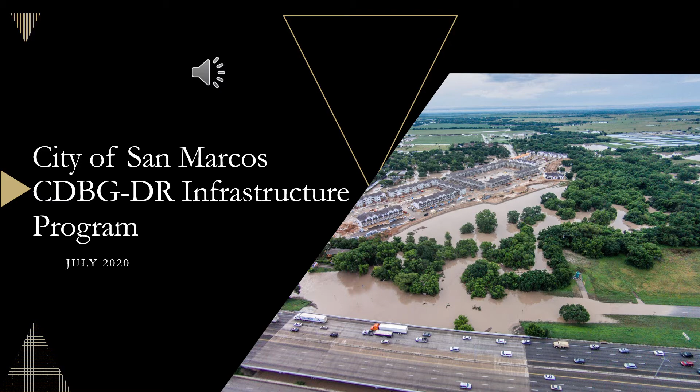Back in 2015, the City of San Marcos experienced two historic flood events that accounted for immense damages to homes and businesses in the community, severely impacting recovery and growth potential. The devastation prompted the U.S. Department of Housing and Urban Development, or HUD, to allocate around $33 million to the Community Development Block Grant Disaster Recovery Fund to assist with ongoing recovery needs.

As you can see here, what's modeled in the video shows the progression of one of the flood events in just one of the areas it covers. If you were in Texas in 2015, chances are you were impacted by these floods, even if you weren't in the floodplain as these areas were.

The CDBG team here at the City of San Marcos is dedicated to ensuring the funds from this program are used in an efficient way to serve the community for its purpose.

Jacque Thomas and myself, Justin Holder, are just two of the members of the CDBG team. We're the engineers handling the oversight of disaster recovery and mitigation infrastructure projects, and work alongside others here at the City of San Marcos to make sure the program runs smoothly. Through this presentation, I'll talk about our experience in the program and what our role means.

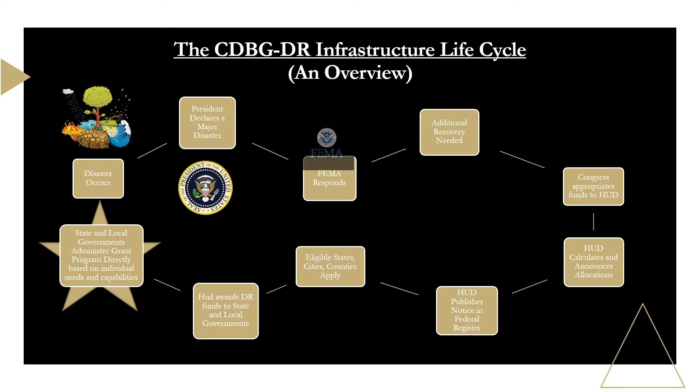Here's a brief overview of how the disaster recovery funds ultimately reach the City of San Marcos. First, the disaster has to occur. For us, it was the 2015 floods, but it can be any major event such as an earthquake, fire, storm, etc. Then the President declares this a major disaster.

FEMA then responds. FEMA is only typically able to respond to immediate needs such as evacuation, debris removal, and in some cases, basic infrastructure restoration. Congress, recognizing this, allocates additional funds to HUD for distribution.

HUD then calculates and announces the available allocations. They post these notices for the available grants in the Federal Register. This allows eligible states, cities, and counties to apply for these grants.

HUD then awards funds to state and local governments. The state and local governments administer the grant program directly based on their individual needs and capabilities. And that's where we come in.

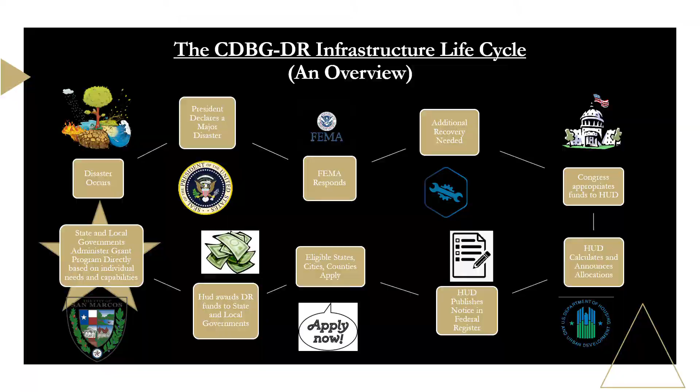At the local government level, the infrastructure projects go through this basic timeline. First, the needs of the community have to be assessed. From this, an official action plan is developed. We then enter the project implementation. This is the bulk of time for the project, which covers scheduling, design, environmental, permitting, utility coordination, bidding, and construction.

Throughout the process, needs are constantly reassessed, and if any budgeting or major scheduling needs change, an amendment has to be made to the action plan. Finally, the grant is closed out once all funds have been expended and the projects are completed.

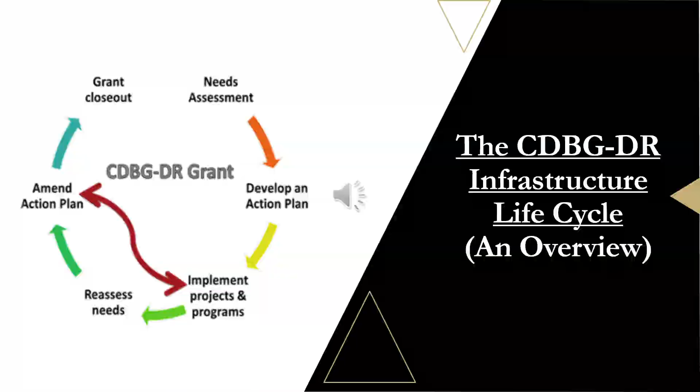Step 1 is the needs assessment. In order to handle this, the city awarded AECOM the infrastructure feasibility study. This identified and prioritized infrastructure projects in the city that were eligible for DR funding.

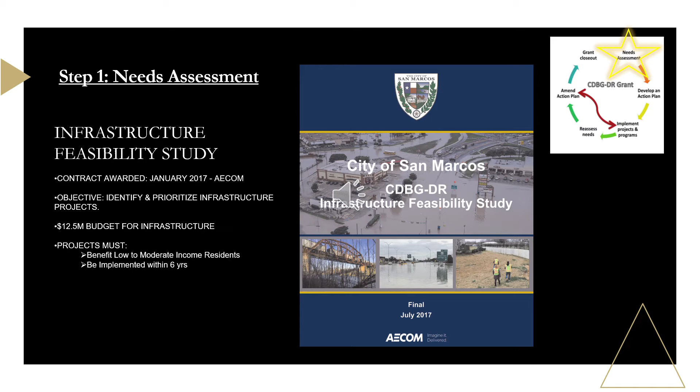Using 2D modeling, AECOM studied the causes for the flooding. In their findings, they determined that both existing infrastructure and proposed solutions cannot handle the 100-year regional flooding with local solutions. However, they can handle local flooding and reduce the impacts of regional flooding.

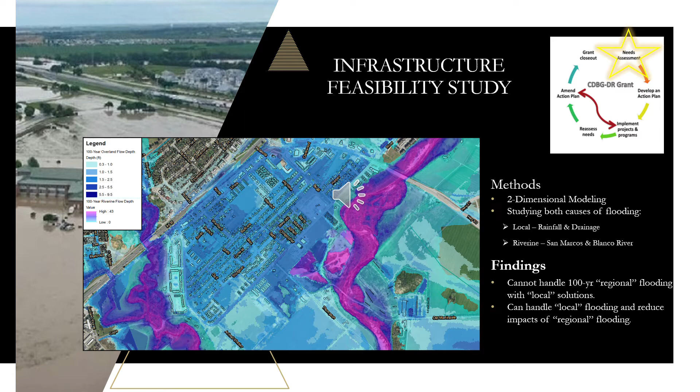The funds allocated from the grant would not be able to cover all the costs for every infrastructure project, and therefore certain factors determined the initial prioritization of projects. Among these were low to mid-income areas, flood risk reduction, good cost-benefit ratios, permitting schedules, mobility improvement, and environmental impact.

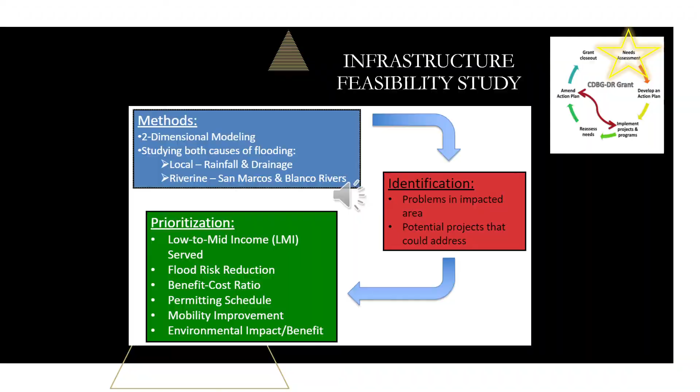From this, a prioritization matrix was established, ranking each of the projects based on this criteria.

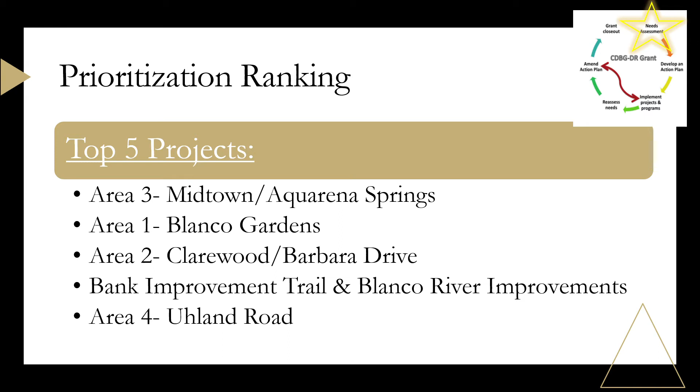From these rankings, 5 projects were ultimately determined to be at the top prioritization: Midtown, Blanco Gardens, Clarewood and Barbara, Bank and Trail Improvements, and Uhland Road. Take a look at some of these numbers and projects, because they will change as we go along.

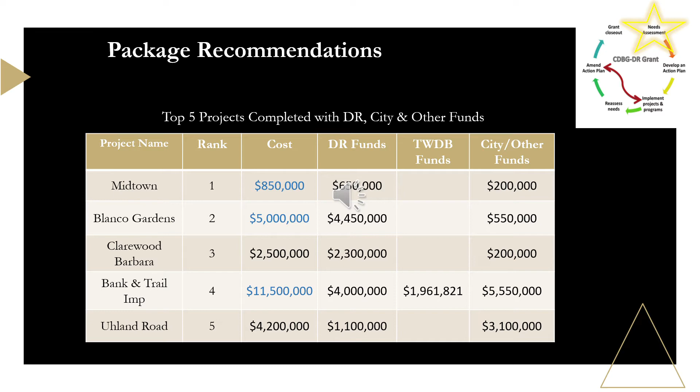The next step in the process is developing the action plan. This lays out the path ahead for budget, timeline, policies and procedures, and prioritization. This is not just for infrastructure projects, but for the entire CDBG DR program as a whole. It includes housing, infrastructure, economic revitalization, and any additional hazard mitigation.

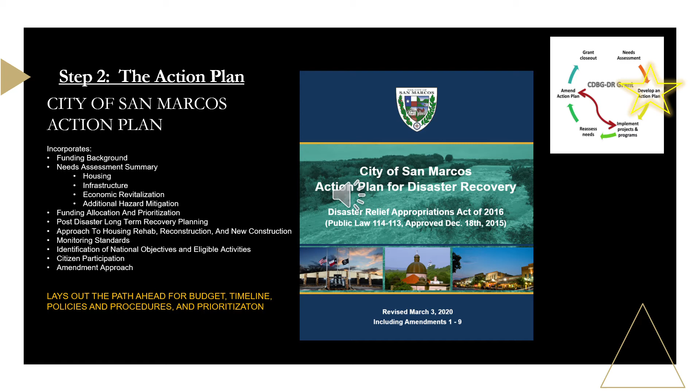Here's a look at the needs assessment as established by the action plan. Between housing and infrastructure, $62 million was estimated to be needed. We were allocated $33,794,000. Therefore, we need to prioritize where this money needs to be spent.

So, what do we do? Well, we go back to the prioritization matrix, where we establish which projects take precedent over others.

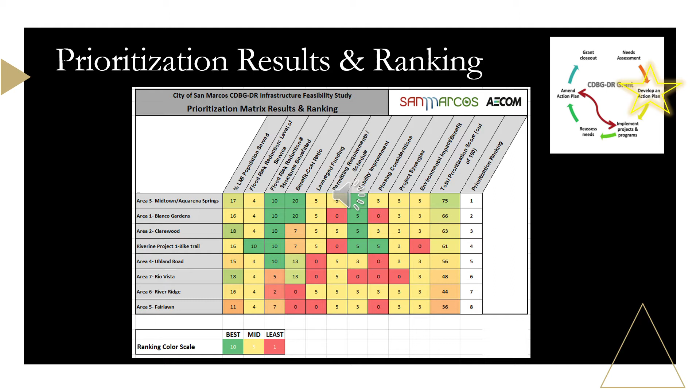So, I mentioned that we had $33 million to spend for this program. Although infrastructure is the majority of this expenditure, it's not the only one. We also have administration, planning, and housing, all extremely important aspects to the whole program.

Even though I don't have quite enough time today to speak in detail about the housing portion of the DR program, I'd be remiss if I didn't at least mention it. There's a whole other team dedicated to running this portion of the grant to handle single-family rehab and reconstruction, single-family reimbursement, rental rehab and reconstruction, and the Public Housing Authority.

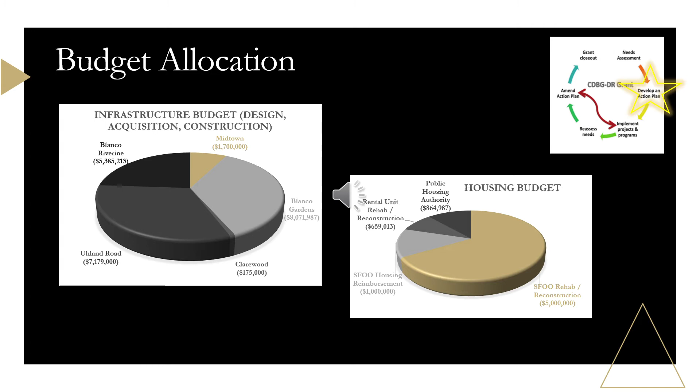Now that we've established the action plan, budgeting, and the projects that we're going to do, let's get into the meat of the subject, the projects.

One of the most important things we can do at the city is establish policies and procedures that we have to abide by. We have policies and procedures for every step of the process: procurement, national objectives, duplication of benefits, risk analysis, timesheets, cost reasonableness, environmental assessment, project design, acquisition, bidding, construction, and closeout. These ensure we go through the necessary steps to complete the project the correct way, and record every single thing we're doing, so it can be repeated.

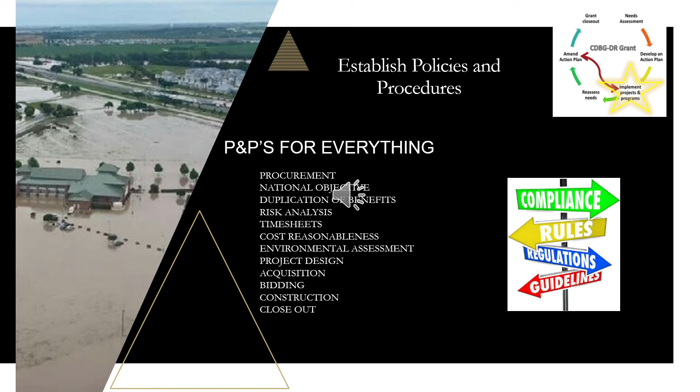Each infrastructure project has to go through these major steps when going through the program. The first step is procurement. In this step, we select the engineer and their subconsultants that are best qualified for the individual project. This selection is based on many things, such as qualification ranking, availability, and familiarity of a certain site area.

The next step in the process is preliminary engineering, report, and design. In this step, we identify detailed needs, surveys, permits, utility conflicts, and establish the realistic expectations for the project going forward.

Then we have the environmental assessment, full design that includes 30, 60, 90, and 100% modeling and construction plans. Then we go into acquisition and relocations, bidding, then full construction, and finally closeout.

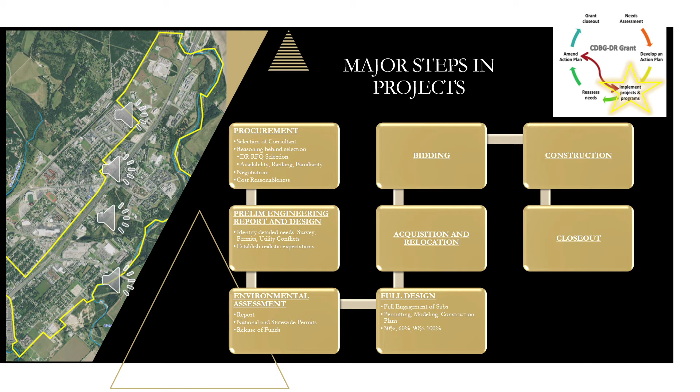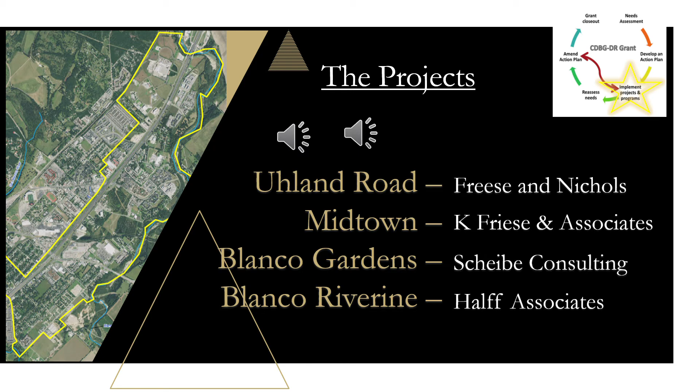Uhland Road will be the first project that will be completed and has been our guinea pig for the whole process. Thank God for Kirk Abbott here at the city, because he has set the precedent for how to organize and develop the regulations for the infrastructure projects.

Uhland focuses on installing new trunk lines and inlets in the neighborhood and replacing existing drainage infrastructure. Water quality measures are also to be installed with this project, exploring a future methodology for future San Marcos capital improvement projects. The reconstruction of roads and expanding pedestrian facilities will also have significant impact on the drainage in this community for recovery efforts.

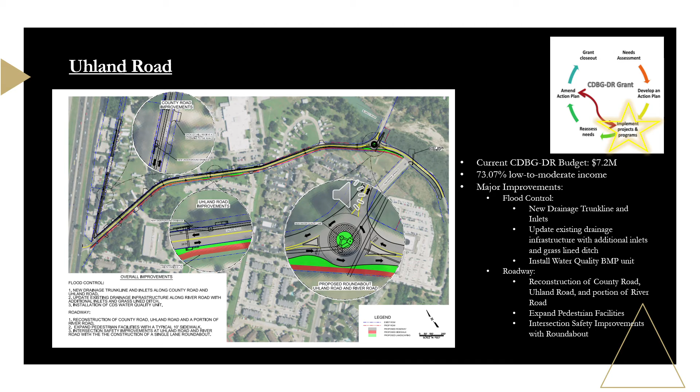Midtown was the top-ranked project on the prioritization matrix. It sets to utilize and improve upon an existing TxDOT drainage channel, upsize culvert crossings, and apply curb cuts and inlets to more efficiently drain water from the highway. This project also creates a new channel to serve existing and future conveyance for developments in the area.

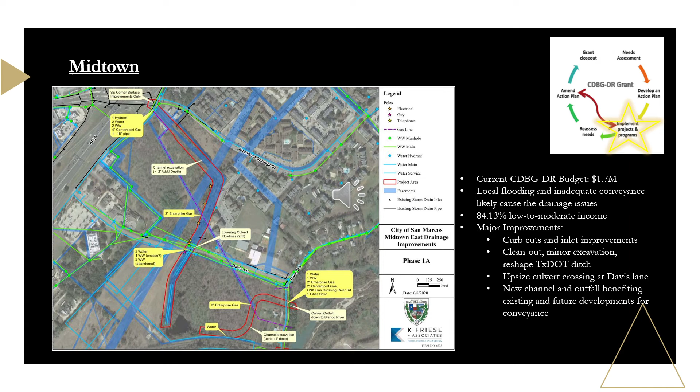Blanco Gardens handles the stormwater in the heart of the flooding from 2015. It proposes culvert crossings across River Road to effectively convey water to the river and replaces and proposes new storm drains and inlets within the neighborhood.

A diversion channel along Animal Shelter Road conveys large amounts of water in major storm events to greatly reduce the risk of flooding. River Road will be regraded to efficiently convey water in storm events to upgrade infrastructure. The neighborhood alleys will also be cleaned and reimagined to provide relief for the residents.

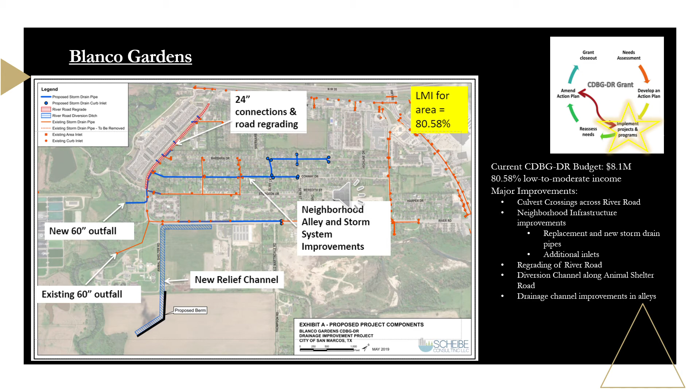Blanco Riverine sets to implement near-term solutions to riverine flooding in the community. The major improvements include multiple berms set throughout the neighborhood, a relief channel, and stream bank stabilization.

Being such a hefty project, the largest hurdle right now is acquiring land in order to build the berms and the channel for this area. Therefore, the DR funds for this project are solely dedicated to the acquisition of property. The design fees are funded by the Texas Water Development Board, and construction is projected to be funded by future CDBG mitigation programs.

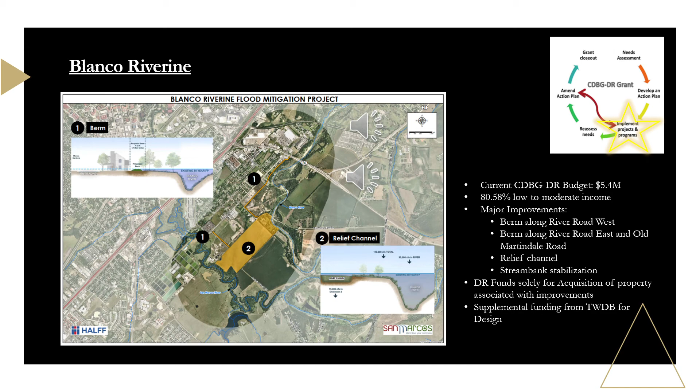Within the design process, we have the environmental assessment. This breaks down every environmental impact that can be associated within the site. Within the EA is permitting for national and statewide permits, which can vary for each project. In addition, notification and coordination to Native tribes, federal, state, and public entities has to occur. Once all this is complete, and a finding of no significant impact or proper mitigation is established, we are able to finally get a release of funds that will allow the city to spend money on acquisition and construction activities.

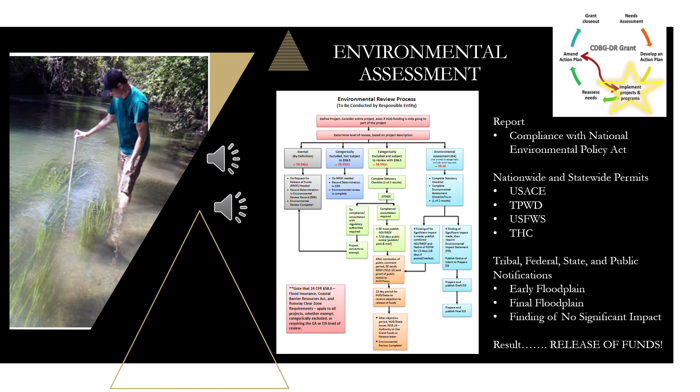Next in the process is coordinating utility conflicts. In the design phase, subsurface utility engineering work is done alongside survey to identify where conflicts occur. From this, franchise utilities are identified and 120-day notices are sent to each entity. While not always the case, engineers from each franchise utility design and contract out the work to be done. The consultant and city staff have to coordinate with these design efforts.

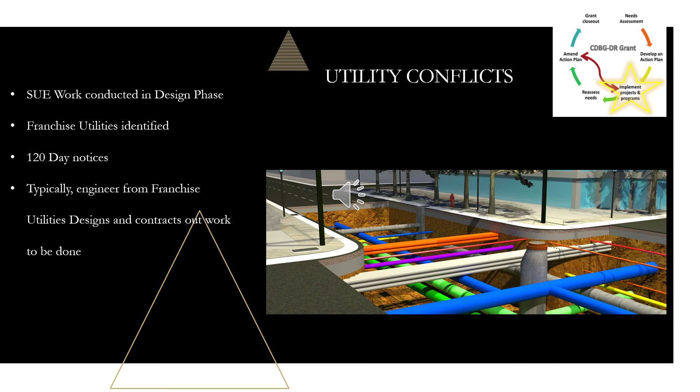Assuming the release of funds has been issued, acquisition and relocation is the next step. If the infrastructure project is within private property, in order for the design to work, the city will have to work with property owners to negotiate acquisition of easements or, in some cases, full takeover of the property. If homeowners are affected, they may have to be relocated and compensated accordingly. In the case a deal can't be made, eminent domain and supplemental legal action will have to take place.

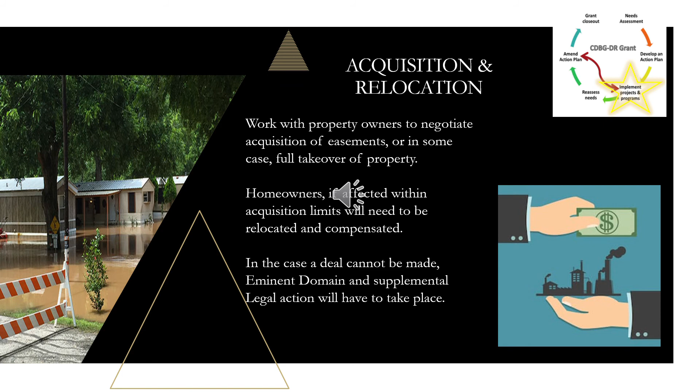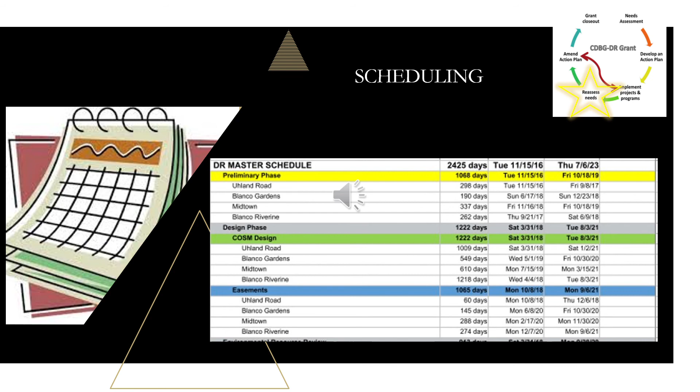As you may have already assumed, based on all the dominoes that have to fall into place and all the aspects that go into these projects, scheduling is key. Each project has its own proprietary schedule that has to be maintained almost constantly. With a final closeout date of December 9th, 2022, we have to be on top of these schedules at all times.

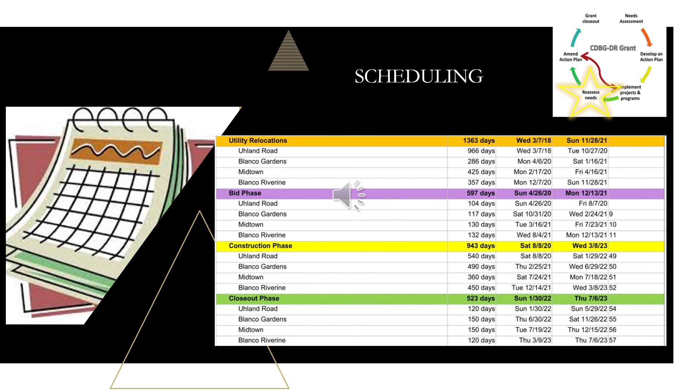Here's a look at where we are with each project as of today.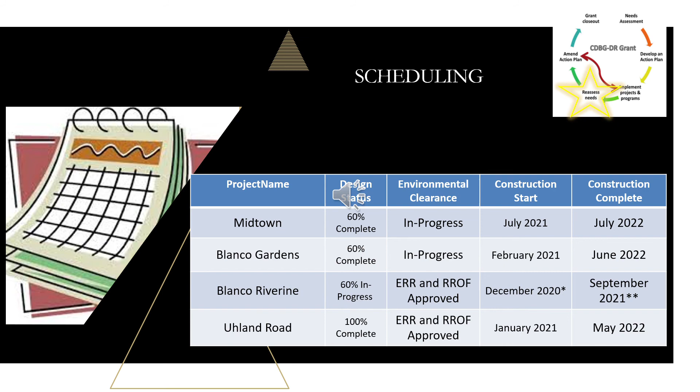Once the project has been designed, utility conflicts are coordinated, and acquisitions are in place, the project is able to be advertised for bidding. The DR program uses a sealed bid method, having competitive bids from qualified construction companies. The lowest qualified bid is then awarded the contract.

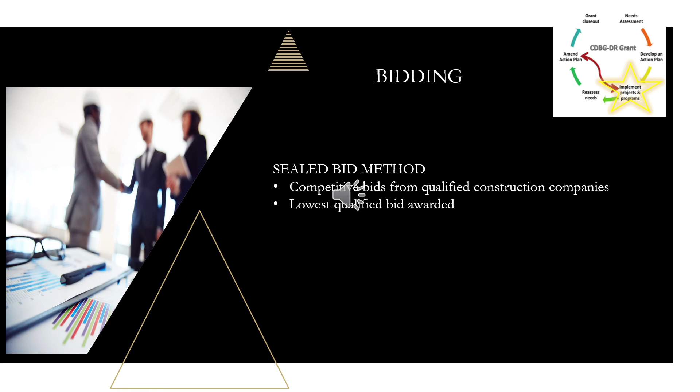Now we come to the fun part, construction of the project. We can see all the work come to fruition. The city staff and design engineer are responsible for reviewing the construction activities in relation to the design. We also have to handle any changes in service that may occur in the field. With this, flexibility is key since there is a hard deadline for the work and budgets cannot be blown.

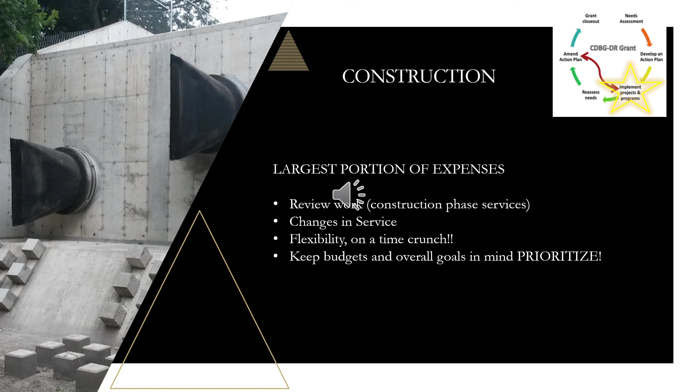Once construction is complete, we enter the closeout phase of the program. Closeout can only occur once funds are expended or the remaining funds are returned. In addition, reporting of accomplishments and performance measures have to take place to execute the closeout agreement.

As I mentioned before, Jacque and I are not the only two members of this team. We have a multitude of staff assisting with running this program to handle all aspects of the financials, review, coordination, and major decision making here in San Marcos. HUD has been a great resource to us, and these projects cannot be accomplished without the hard work behind the consultants designing and constructing the work who deal with us every single day. Together, we are able to serve the community with these grants and look forward to seeing their impact.

If there's only one thing I can take away from this process, it's to document everything. If you aren't aware, these grants are federally funded, which means they're subject to regular auditing and public information. Although sound decision making is always exercised, being in the public eye, it is vital to have the procedures in place for every single aspect of the project.

We live by schedules here. As I'm sure you know, infrastructure projects change, but grant deadlines do not. It makes everyone involved flexible and innovative with how time and money is spent and how priorities shift very quickly.